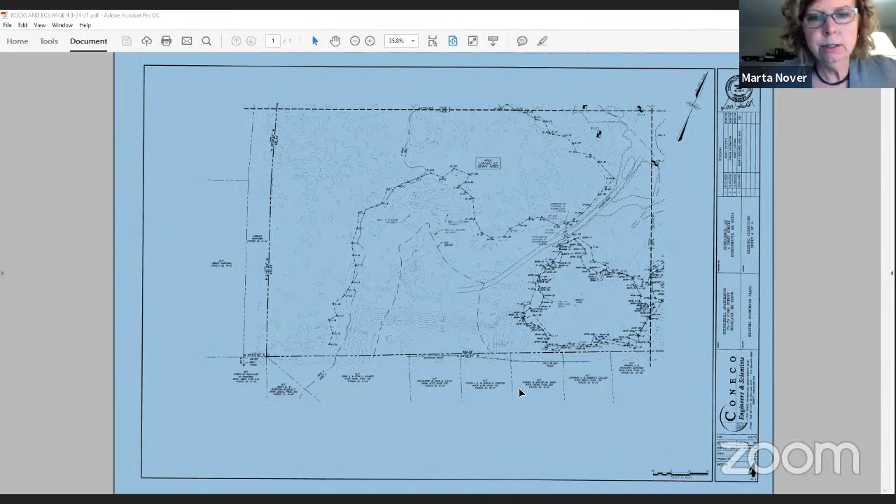Marty, is that good for you as far as where you need to see? Yeah, that's fine - I haven't even looked at the plans or any of his information yet. Okay, well then let's get a first look. Can you see this first plan? We can, it's a little small, but it'll work.

The main thing is this is the survey plan, and the survey plans are in 4 sheets. I'm only going to show you the one sheet where all the action is happening on the site, but we did submit all 4 sheets of the survey plan.

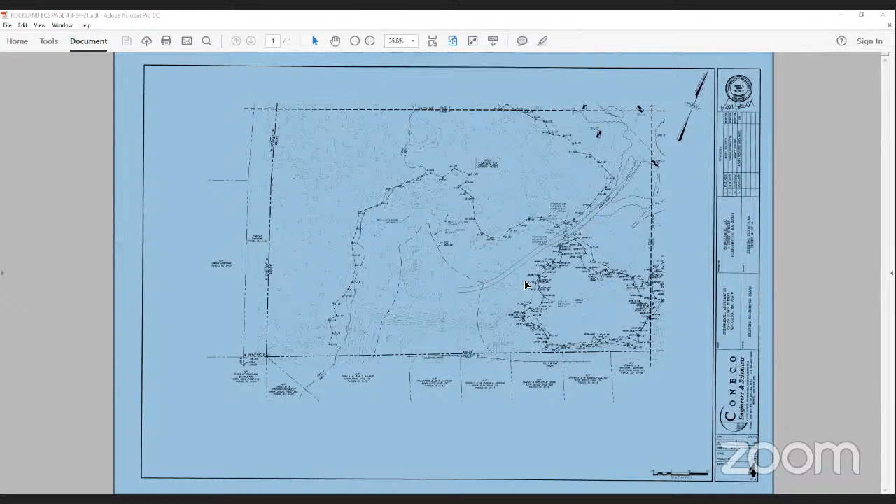One of the things Marty asked for is that we have the plan stamped by a registered land surveyor, which we did. It shows all of the buffers, all the wetland flags, and the detailed topography on the site. So that's one plan we were asked to provide.

Another plan we were asked to provide is based on that plan I just showed you a minute ago. It's this one here. Can you see it yet? Should be a new plan up on your screen. Not yet, let me try it again.

We can hear a commercial, but there it is. That's not me.

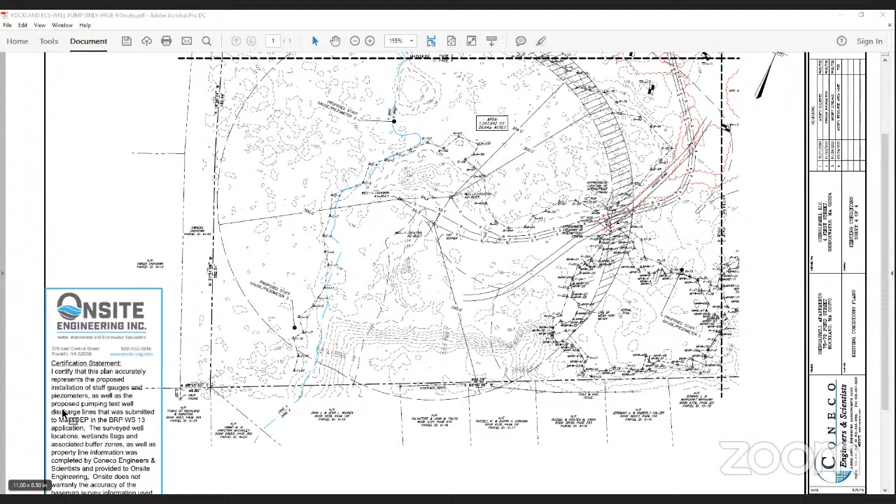So this is the second kind of plan that Marty had asked for. This one, if I can scroll down, let's see if we can do this. This one is stamped by a registered professional engineer from On-Site Engineering, who did the pump test application to the DEP, did the pump test protocol design, and will be conducting the pump tests. So this plan is stamped by Susan, the registered professional engineer.

This is based on the surveyor's plan I showed you a minute ago. This plan shows the locations of the wells here in the middle, the locations of the 3 piezometers, one up here in the wetland, one down here in the wetland. And then we took the one that was in the vernal pool and moved it up outside the vernal pool. It also shows the discharge line path, which goes just off the corner of this plan onto sheet 4.

That's where the crib is, literally right up in here on sheet 4. It shows the discharge lines from the 3 wells coming to the crib up here. So this plan shows where all of the physical elements are going to be located for the pump test on the site. It's got the topo, the resource area boundaries, and the buffers as well.

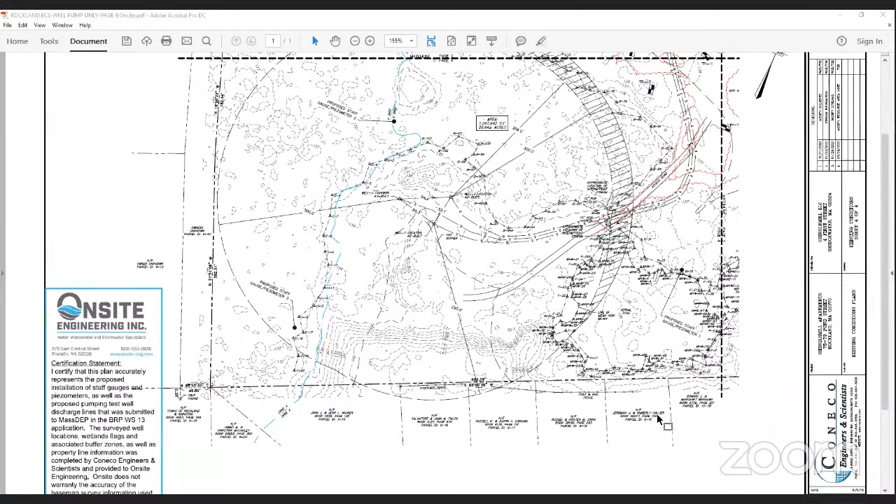Stop sharing this one for a second. No, that didn't work very well.

So this is the memo that I wrote to Marty, going through her comments. We can just go through those quickly, if that's okay.

Yes, please. The first was a question about abutters. I think we clarified this last time, but I wanted to put it in writing that all the abutters for both parcels were notified, and a legal ad was put in the Patriot Ledger. We submitted copies of everything, the green cards and the Patriot Ledger tear sheet, to the commission. I believe that was addressed correctly previously.

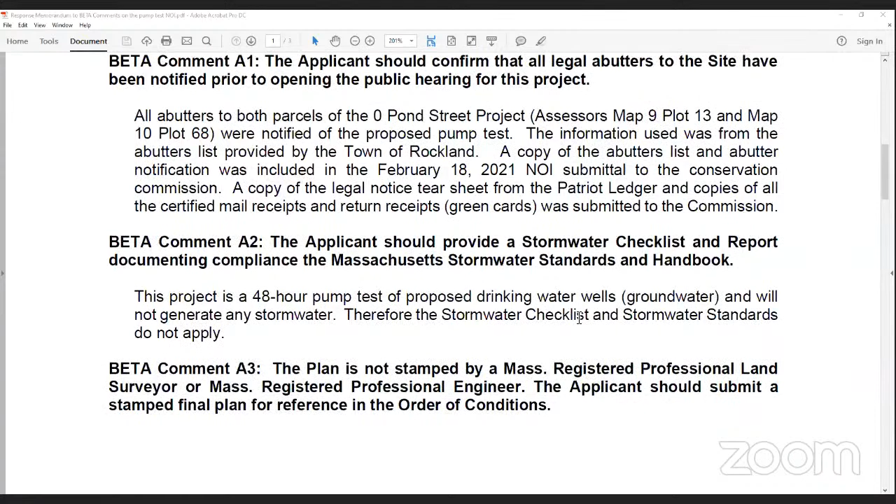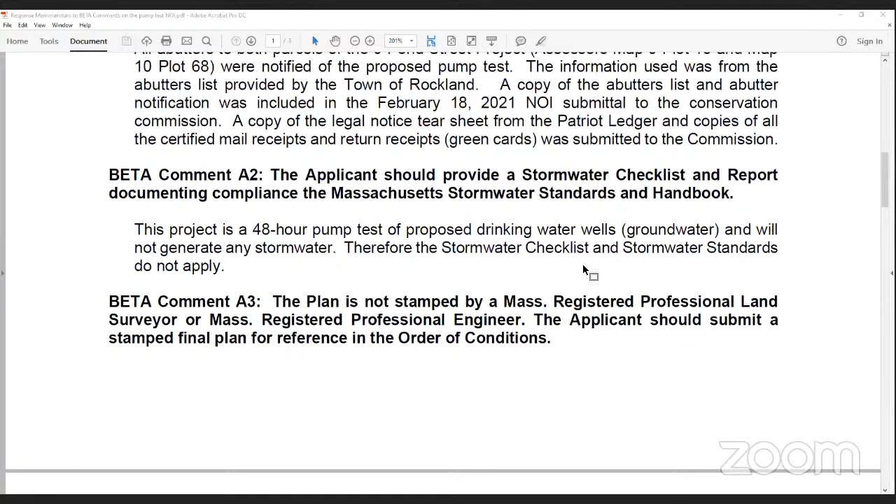The second comment was that we should provide a stormwater checklist and report. This is not stormwater, this is a groundwater pump test. So the stormwater guidance, the stormwater checklist, does not apply to a groundwater pump test discharge.

Mr. Chair, can I comment on that, please? You go right ahead, yes please Marty. There's only 3 types of projects that are not subject to the DEP stormwater reg standards, and this isn't one of them.

So many of the standards don't apply to this project, but erosion and sediment control does, which is one of the standards. Hold on, let Marty finish and then you can rebut, Michael. I'll give you your time, I trust you.

It's a very simple exercise to provide a checklist and a simple stormwater letter report that basically states why particular standards don't apply, and for the ones that do apply, like erosion and sediment control, how that is being handled. One of the items is your discharge location can be corralled with compost filter tubes and whatever. So it's a real simple exercise. This project does apply to the DEP stormwater regulations.

I agree that it's something simple, we'll probably wind up having to do it, but I'm going to disagree that it applies, because at the top level this has to be stormwater, and then you go down to the types of projects that don't have to comply. At the top level, this is not stormwater, this is a groundwater pump test, very different from a stormwater discharge. Michael, how hard is this checklist to do?

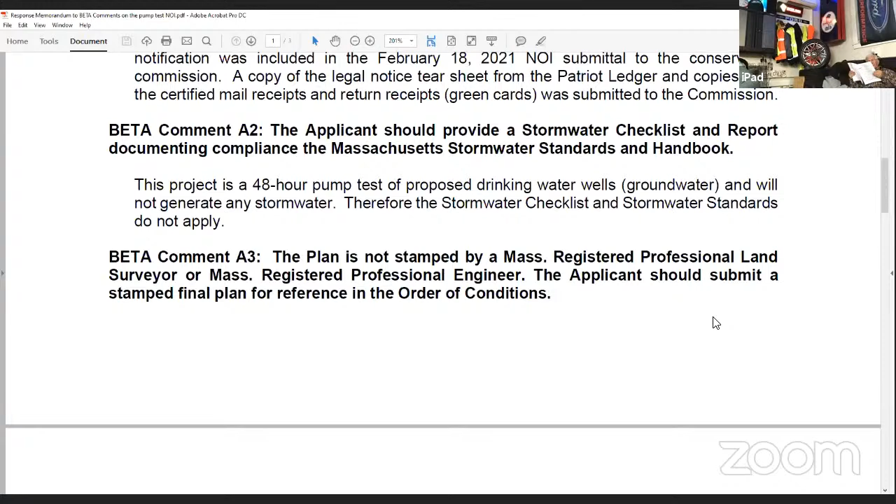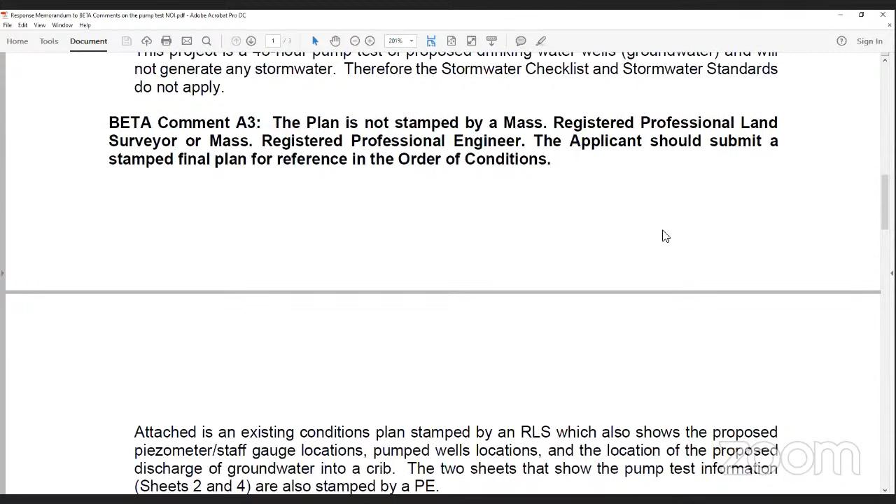Okay, I'm not going to win this one, so I'll bring this one back. The third comment was that the plan was not stamped by a professional engineer or land surveyor. As I showed you, the plans now have been stamped by both an RLS and a PE.

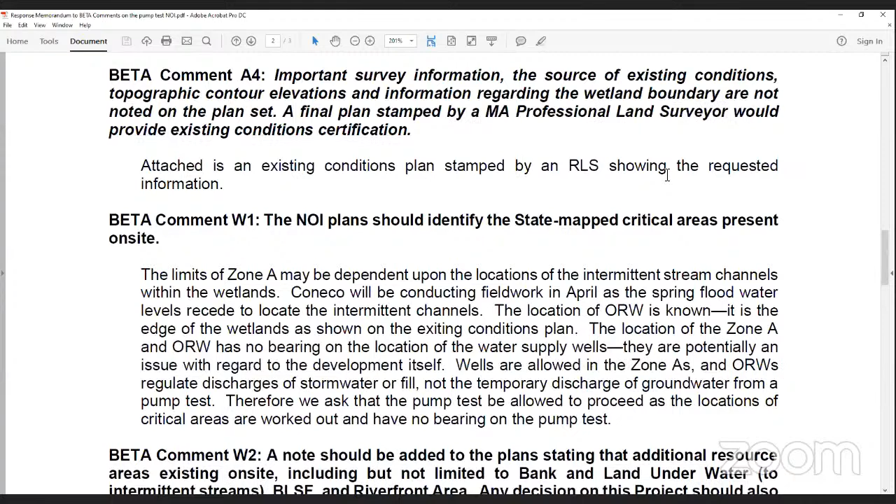The fourth comment is again about the survey contours and other information. Everything is now on the existing conditions plan. This is strictly an existing conditions plan that we're working with for the pump test. We're not proposing building anything. We're just testing the wells that are out there.

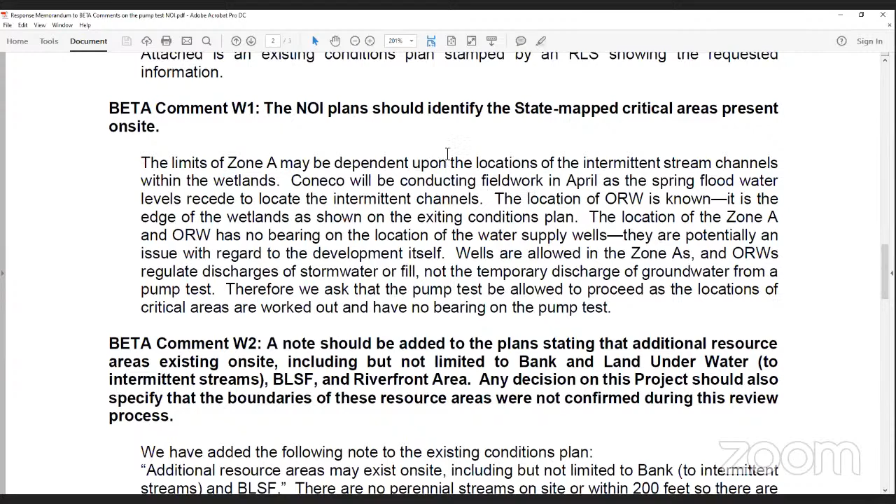The next comment is state map critical areas on site, and this is tied up with the Zone A ORW that we talked about in the previous hearing. What I noted in the comments is that the location of the ORWs is known on this site. If there are ORWs, they are the wetlands on the site and the streams on the site.

The location of the Zone A and the water supply wells doesn't have any bearing on the ORW. That's the purpose of the pump test, to make sure we're not having an adverse effect on the vernal pool and the wetlands on the site. So that's the primary purpose of running the pump test: to make sure you get the adequate supply out of the wells, but that when you do, you don't have a negative impact to local surface and groundwater. That's what we're testing out there.

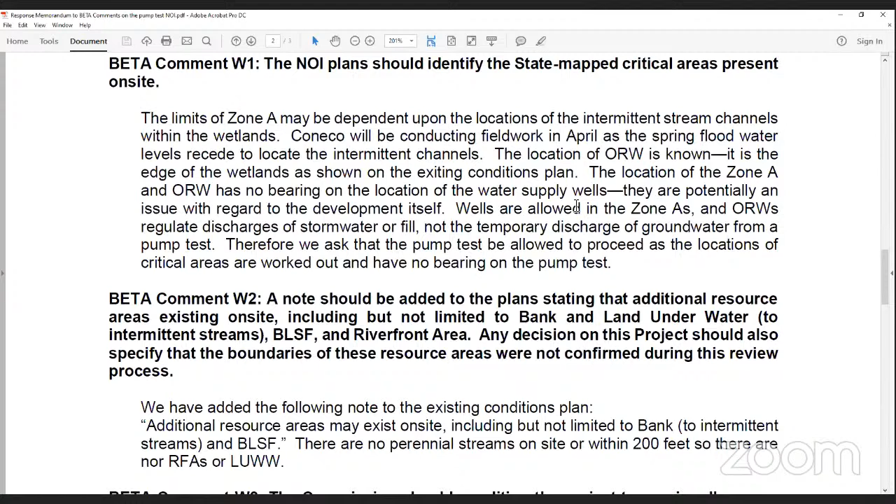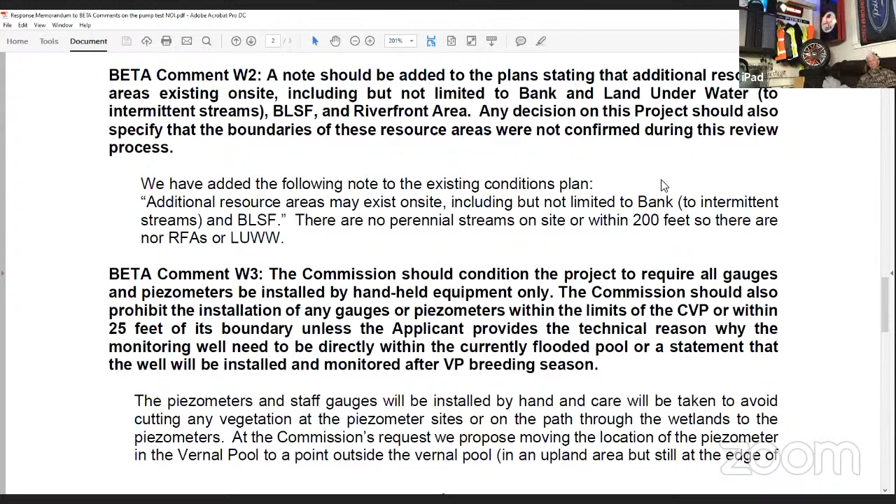The next comment had to do with... Before you move on, let's just resolve that. What you said makes sense, Marty, do you want to chime in on that?

The reason I included a comment on that is because once an order of conditions is issued by the commission, that's a record plan. I wanted to make sure all the resource areas are shown on the record plan, so that it's not legally set for three years, which would have implications to the actual project itself.

So you're saying if it's locked in, it's locked in for everything, not just this. Okay, I just want to make sure the plan is clear - if they don't want to include the Zone A, we can state in the order of conditions that a Zone A exists on the site and is not identified on this plan. It's kind of a type of identified thing on the plan, and then it's legally set, unless they appeal it.

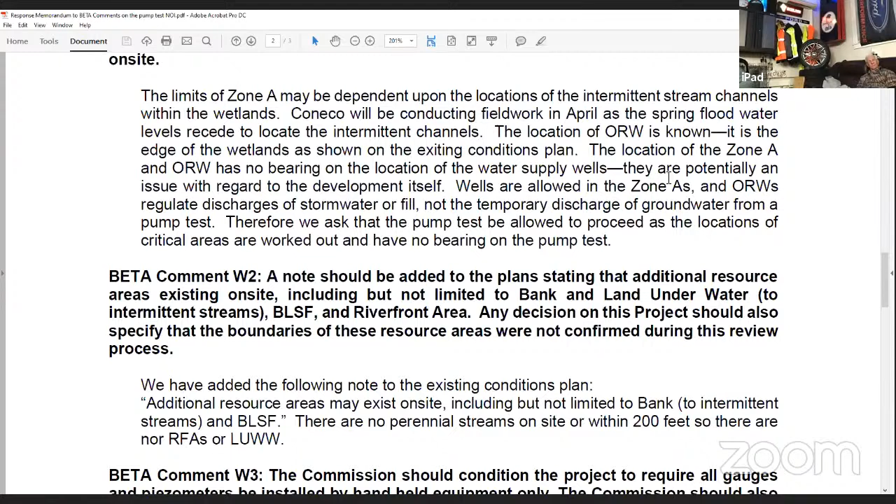Michael, you all right with that? Sure. Okay, all right, we can move to the next one. Go ahead, sorry.

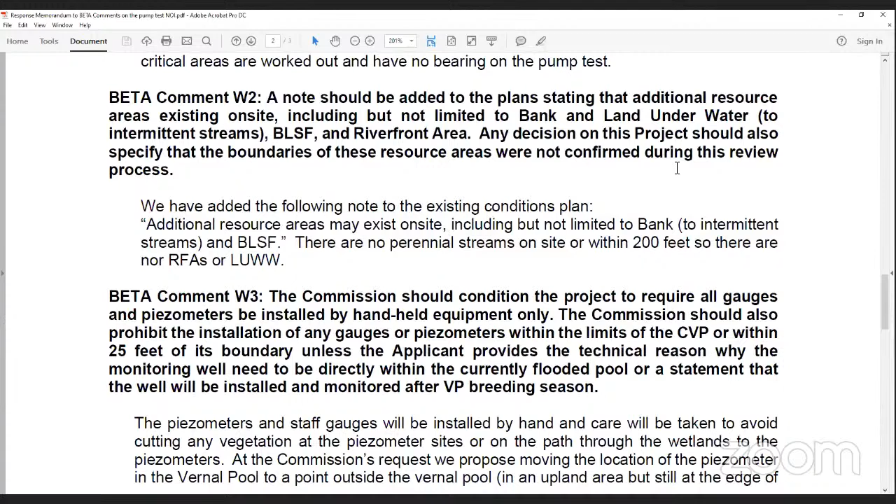Those resources are shown as best we can. Bank is one we're still working with, as Marty knows, trying to go back in, and that also has to do with where the Zone A would be, identifying the bank of those streams that are deep into the wetlands. That's something we still have yet to do. We have to finish that up.

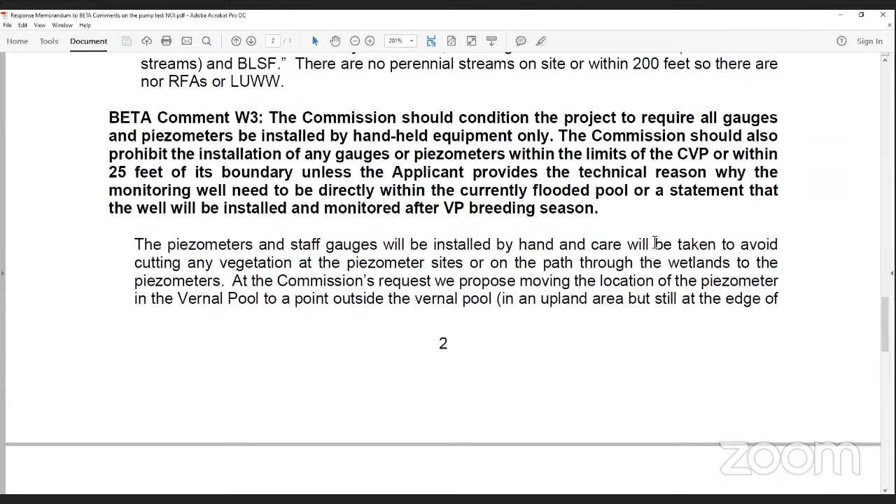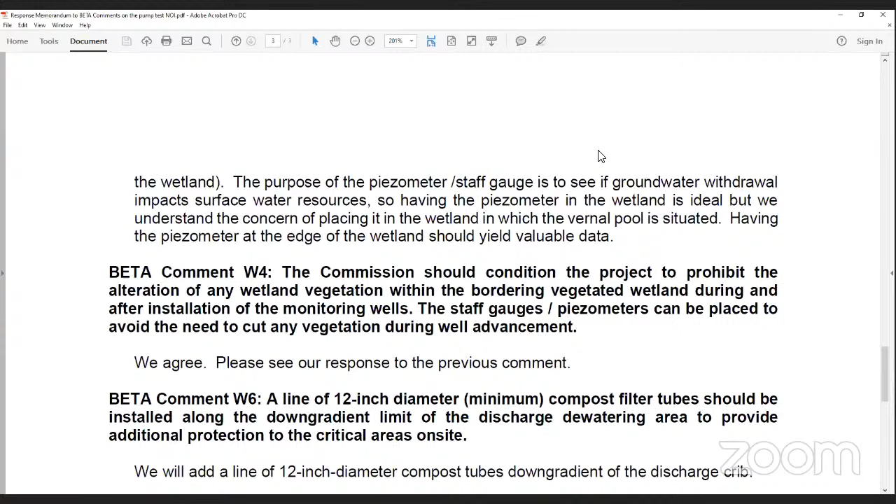The next point is that the gauges and piezometers be installed by hand, which we are doing, and that the piezometer not be put into the vernal pool. The other part was that the well be installed and monitored after vernal pool breeding season. At the time we started talking about this, we were getting ready for big night and movement toward the vernal pool. We've had the migration and the egg laying at this point. So we are moving that piezometer staff gauge outside of the vernal pool, but I would still like to see, by putting it just outside the wetland, whether the groundwater level in that area is affected. Because if it is, we have to turn off the pump test. So it's important to know we're not having an effect on that vernal pool.

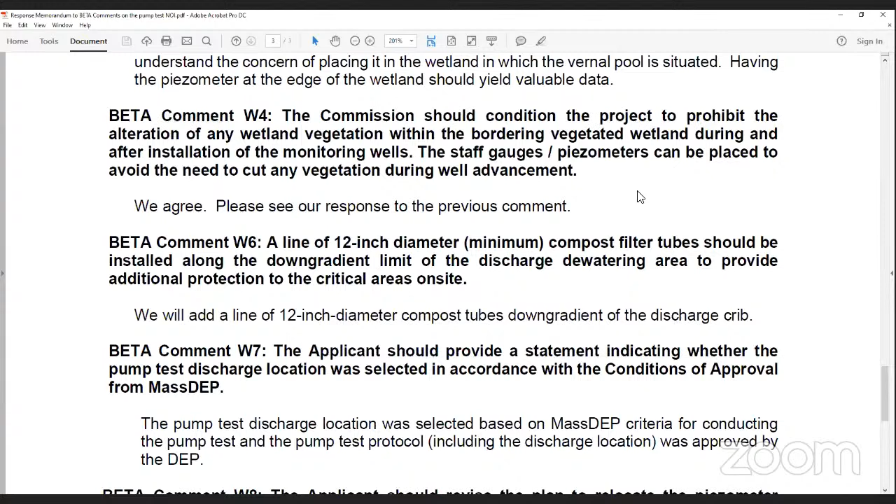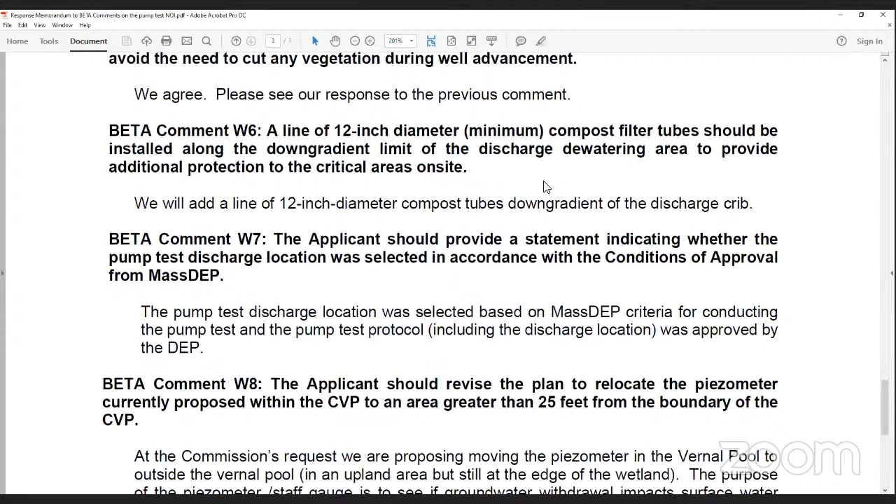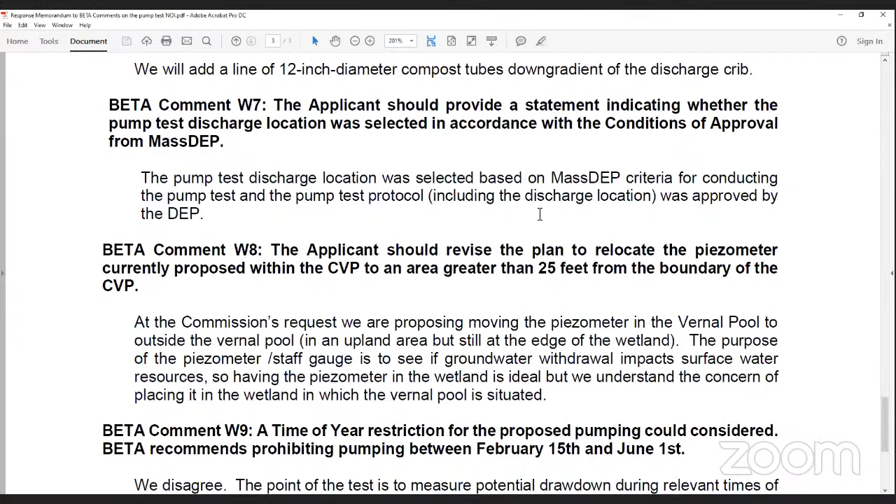The next comment, number 6, had to do with added BMPs onto the discharge end of the pipe. We've agreed to add a line of 12-inch diameter compost tubes down gradient of the discharge crib, which will also have not just straw bales, but filter fabric and rock around the outside of the crib on top of the filter fabric. The pump test was approved by the DEP, and on the plan, Susan, when she stamped it, cited that also, giving the application number for the pump test.

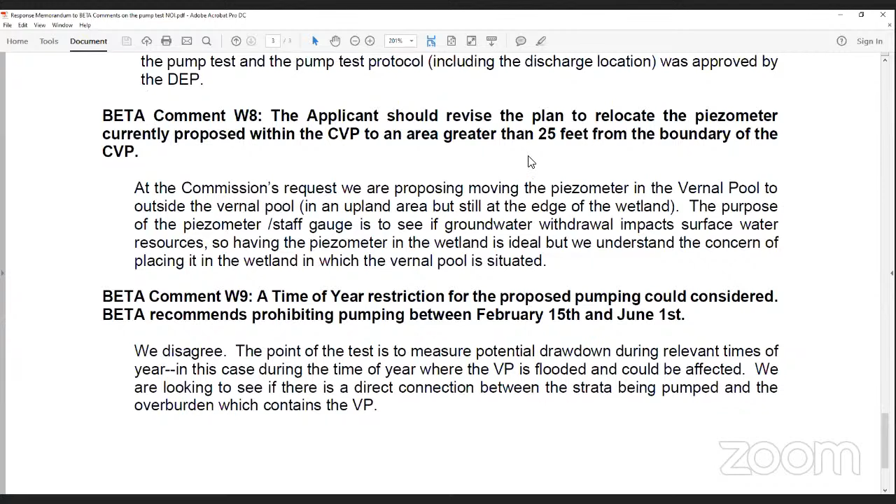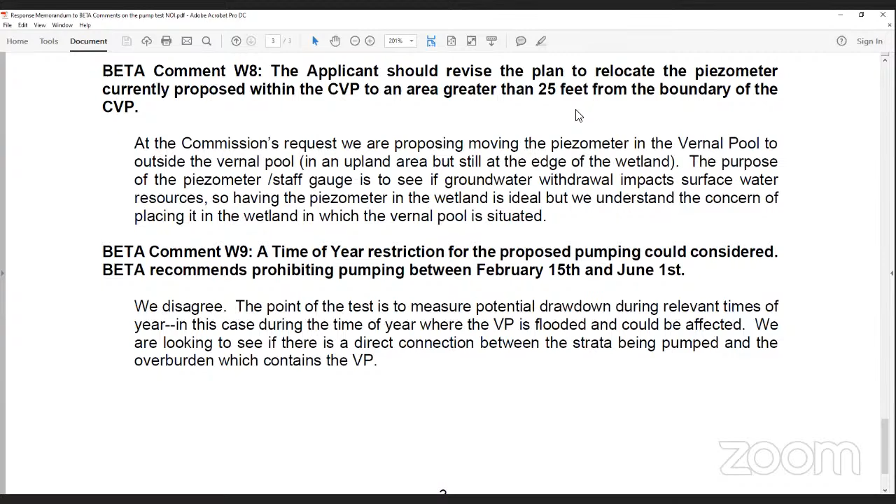We did revise the plan, number 8, to move the piezometer outside of the vernal pool, but we did not go 25 feet away, and I want to make that clear. I really think we want to get as close to the edge of the wetland as we can, not putting it off into the upland, far into the upland buffer zone, because I want to know what's happening in that wetland system when we have the pump test running.

The last point was pump test restriction not between February 15th and June 1st, and I disagree with that. I think the point is to measure the potential drawdown during the relevant times, and that's when the vernal pool is flooded. It doesn't do any good to go out there in the middle of summer when the water's down in the vernal pool. I want to see that interaction between groundwater and surface water, whether groundwater pumping from a bedrock well is affecting not just shallow groundwater but pulling surface water down as well. That's the purpose of monitoring this with a staff gauge as well as a piezometer.

So those are my responses to, I think, the 9 comments. Those are my responses to the comments. So Marta, I don't know whether you want to weigh in on any of those.

I think the last one is really the only one, I'll leave it to Marta, but I think the last one is probably the only issue. Marta, would you agree?

I mean, we can consider this. Right now the water is down in that pool. If we don't get any rain, which I think we're going to get some this weekend or Thursday, that would be helpful. By the time they do the pump test, there may not be water in that pool. Anyways, I think the pool probably represents groundwater levels, so that if they do the pump test in May or June and there's no water in the pool, they'll have to determine the effects on the pool based on their pump test and their measurement of groundwater.

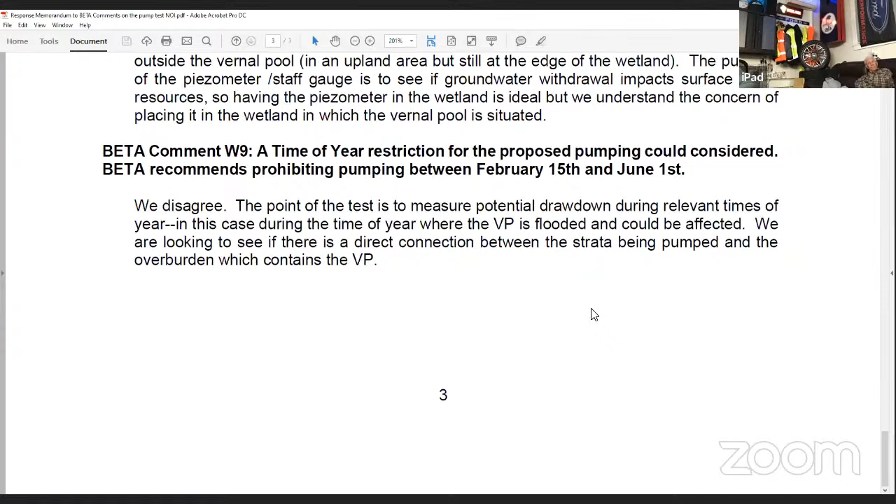I'd obviously agree with that, I said that. So if you could have those numbers, I think that would be helpful for us. I think I have the numbers, they were included. I could be wrong, but the actual permit from DEP describes the 3 wells and the gallons per minute proposed pump rate.

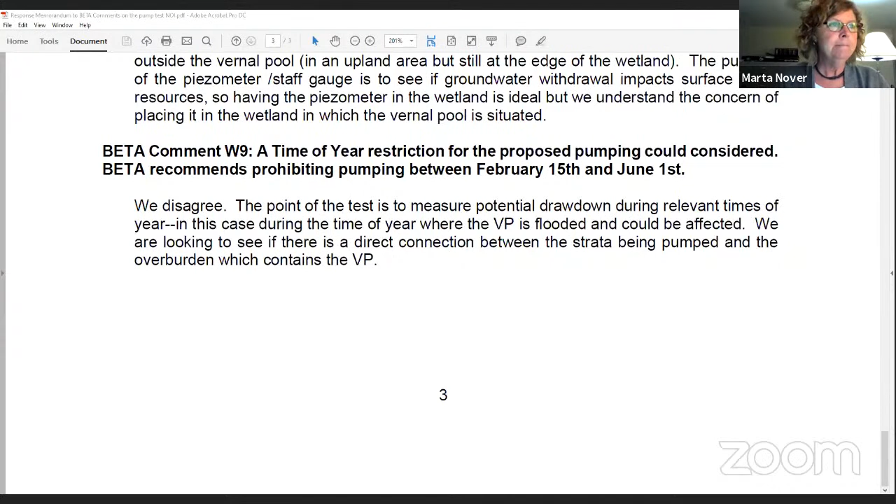So well 1 is 11.8 gallons per minute, well 2 is 17.1 gallons per minute, and well 3 is 20 gallons per minute. The requested withdrawal rate based on Title V design flows is 37,730 gallons per day based on 340. The maximum available withdrawal for the combined wells is 52,807 and 61,566 gallons per day. Okay.

All right, well, let's see how this pump test plays out. Doug, I have a question for Marta. Sure, go ahead. As of the end of last week, this part of Massachusetts has just gone back into drought status. How does this affect these pump tests? I mean, are they going to be accurate?

Yes, because they're measuring the groundwater and the impacts of the pumping on the groundwater. Depending on where the groundwater is at any given day, they measure the effects of the pumping on that groundwater in vertical feet. So if the groundwater is high, they'll measure the vertical feet from that point. If it's lower, they'll measure it from that point.

I think the pump test is just a test. The actual use of the wells might be a different issue. I think that's the road you're taking, Lorraine, and I agree with you—a test is just a test. It's just a matter of getting the data and moving on from there.